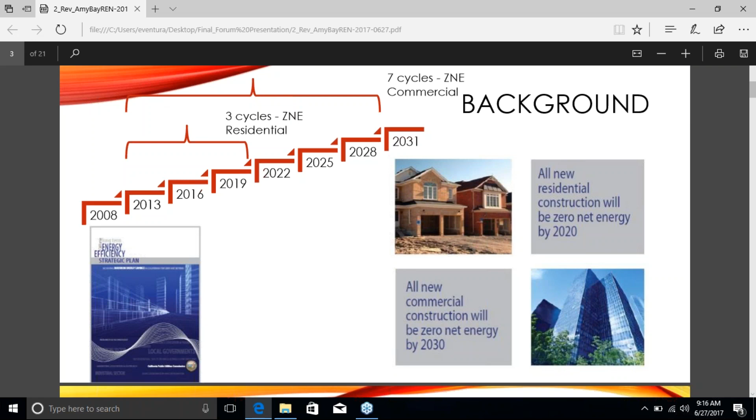So, oh yeah, oh sorry. Oh shoot, sorry. That's annoying. Sorry about that. So I'm going to take us through a little bit of perspective on where we are. I should not have sent a PDF. Sorry. Sorry. I know, that's all right. I can, if I scroll, I'm okay as long as I don't try to.

So I put this up there again just to give a little bit more context to where we are. So it was in 2008, right, the CPUC did the strategic energy efficiency strategic plan, and that was the first time we did not just short-term, but long-term planning to figure out what are we going to do and how are we going to start looking at these pretty ambitious state goals. And so that was where we got our 2020 ZNE goals defined at that point in time for residential as well as commercial. There were other bold initiatives in there in terms of making sure low income were served by a certain time.

But what I wanted to point out in terms of timeline, if you look over at that stair step on the left, so 2008, we said, okay, here's our goal for 2020, 2030 ZNE for residential and commercial. That was already after the 2008 standards were adopted. So then we had 2013, 2016, and then by 2019, we had to have that standard in place. So 3 code cycles for that. That is not a particularly long period of time for us to be going through that.

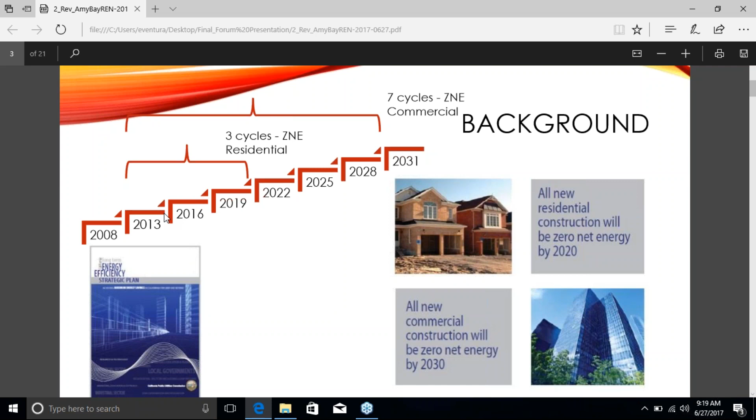So a lot was happening, and the approach to ZNE at this time was kind of energy efficiency and then some PV, and there we are, right? That was kind of our perspective. And so if we think about that time, zero net energy was super simple, right? We're generating as much energy as we're going to use on an annual basis. So it was site energy, it was super simple. It was doing it over the course of that year.

Then things started to evolve a little bit as we started to think more, because we're thinking about energy efficiency and we got some solar thermal, solar electric, and we're good. In 2016, that shifted. We're starting to look at something called the Energy Design Rating Index, the EDR, and we said, okay, well, now we're going to look at zero net energy as an EDR of 0. So you're taking still all your energy efficiency, using this time-dependent valuation metric, and then doing PV to get to 0.

What did we find out? That was not the best approach, is what we found out in the short term. So if we look at this, this is our energy design rating scale. Here's our 0 home. 100 is your code home. It's tied to the 2006 IECC, which is the International Energy Conservation Code, so that's what the rest of the country uses. And about a 2016 home is somewhere in the vicinity, 50, 60, 65, somewhere in there.

What we found out, we started doing some evaluation of, okay, well, if we're looking at EDR of 0 as zero net energy, how cost effective is that? What does that mean? Well, when you're doing it this way, you're offsetting not just your electricity, but also your gas. So we realized what was happening is we were supporting oversizing of PV significantly because you're offsetting my natural gas consumption with lots of PV to kind of equal things out over the year. This is not working out really well.

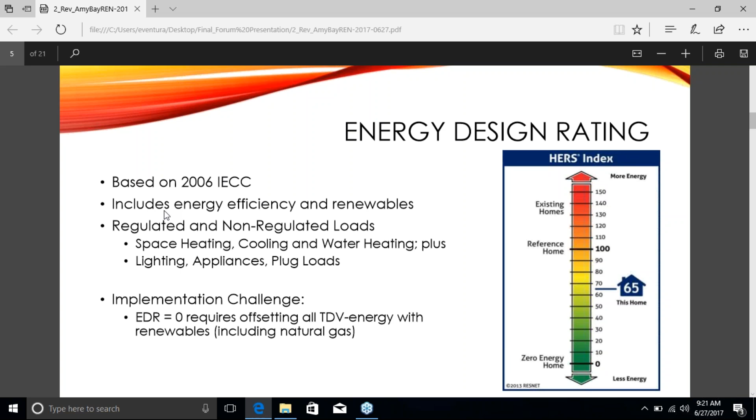How many times have you guys seen this image? Like every presentation you ever go to now? But I still had to.

As we look at this, I'm just going to make sure I'm not missing anything. As we did that cost effectiveness analysis, looking at ZNE and EDR of 0, and looking at our TDV metric, we realized that zero net energy is a little more nuanced and we have to think about it more critically.

We've got large scale deployment of PV, and PV on a lot of residential or individual buildings. We have an RPS standard, a renewable portfolio standard, so that's going to result in 50% of our energy coming from renewables, which means the value of our PV from a consumer standpoint in the middle of the day starts tanking significantly. The value of the energy is less because we have more of it.

What's also happening in this scenario is that duck curve, particularly exacerbated in the shoulder season. As a New Englander, I think it's kind of funny that we have shoulder seasons in California, but we do. In those shoulder seasons where we don't have a lot of cooling, that uses more of that daytime production, and this is really exacerbated. So our peak is shifting farther into the evening where we don't have that renewable production. We're getting this exacerbated effect.

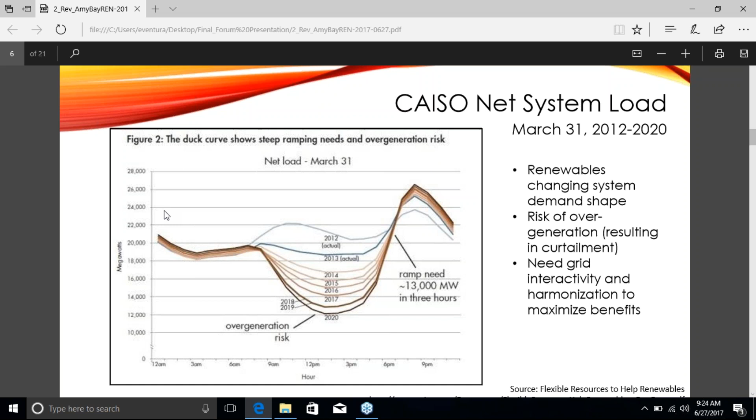We're realizing this and figuring out how do we get our renewables, have our 50% renewable portfolio standard, and then there's the bill in the legislature right now to go to 100% by 2045, pushing it up 5 years. So how do we get there? We're flattening out that belly of the duck curve - it's not so fat there, it's still streamlined, it can fly.

This is a really exciting time, at least for me in this industry. To do this - and we've always wanted to do this - it means an integrated approach, which is super exciting, because a lot of times we have energy efficiency, here's my solar thermal which is renewable, here's my PV, here's transportation, and maybe somebody's talking about storage. It's been really compartmentalized.

The conversation now, and hopefully you'll hear some about it today and at other venues, is this more integrated approach where we're looking at energy efficiency, because that makes sense, just reduce that load. Thinking about peak renewables and matching that - production and demand, aligning those at load shifting, and looking at storage and demand response. All of this to make sure that even though we have this decrease in value of PV during the middle of the day because of overproduction, we can maximize that based on demand response or storage and offset the peak later on.

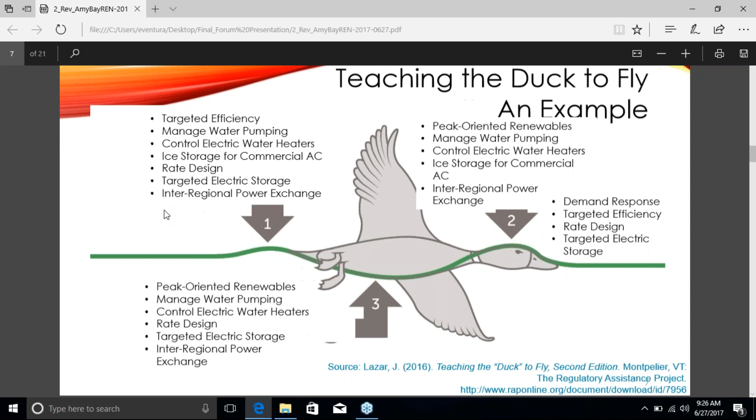So what does that mean? As we think about the 2016 or 2019 standards, we defined net zero energy, and we had the EDR for 2016, and it wasn't working. We did that analysis, so for 2019 we said we better revise this - and this is the general 'we', I'm not doing this myself - to make sure we're sending the right signals, that folks can engage in this in a flexible way, that they can be innovative, but yet we're setting a bar.

So for the 2019 standard, we are looking at 100% of the electricity use. We're not trying to offset our gas use now, we're just looking at the electricity use. Our baseline is a mixed fuel home.

What's going to be coming out of our compliance software is looking at your EDR just for energy efficiency, but then also for renewables. We may get to see storage in there too, which would be pretty cool. Things are in the works right now. And we're not trying to get to 0, we're trying to get to about 20. So the main goal for this was to encourage folks to go this way of energy efficiency and renewables coupled together, but not promote oversizing of our PV systems, so we end up with really uneconomic pushback to the grid.

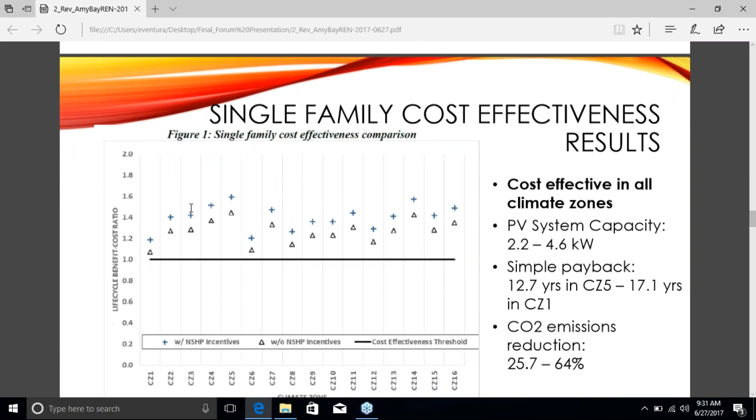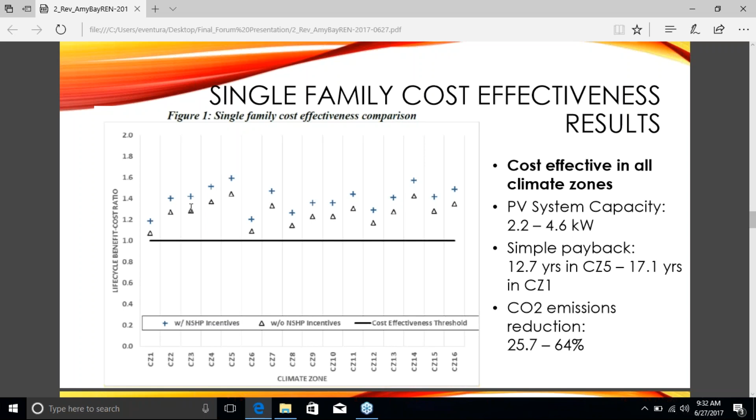So I'll go through this pretty quickly. It's cost-effective in all climate zones, and you can see the range of PV systems, 2.2 to 4.6, seems pretty reasonable, we're not crazy size. Payback period, 12 to 17 years, and there's your carbon reductions, anywhere from 25 to 64%. They did the cost effectiveness - you can see the triangles have it without the New Solar Homes Partnership, that's what NSHP is, and with it is the crosses. So obviously without it, it's slightly less cost effective, but well above the cost effectiveness threshold.

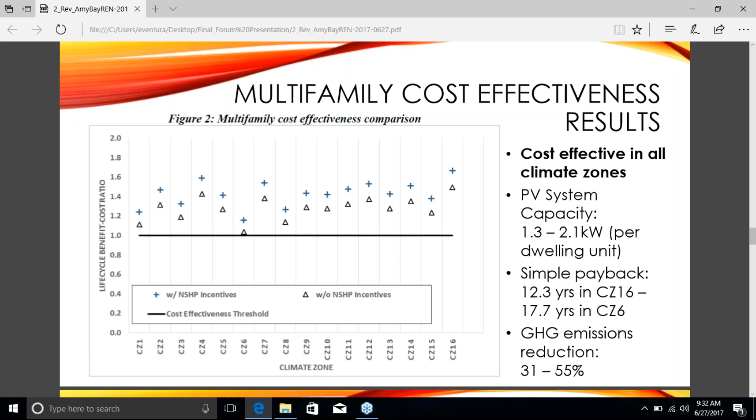From a multifamily side, this is done on a per unit basis, based on the 8-unit prototype in the software. It's 1.3 to 2 kilowatts per dwelling unit. This is low-rise multifamily - you can see it's not as cost-effective as single-family, but we're still there. And similar payback, 12 to 17 years.

What's on the website right now is the draft CEC ordinance template, as well as a cost-effectiveness study. So you can download those from the CEC's website, and you can be utilizing those in your submission for a REACH code.

I'm going to go through a couple more things before I wrap up, and I don't think we're going to do any questions because I think we have questions later. So I just wanted to share a couple of additional options, just because you're going to hear from Rachel.

And Rachel, right? Is Rachel doing San Mateo too? Oh, Kathy, sorry.

They're coming from the jurisdiction standpoint, they can tell you that perspective. I can tell you kind of what I hear, and what I hear is we need something easy, we need something clear, and we want some flexibility.

Because while there's some standards out there, every jurisdiction is a little bit different. So just to quickly share a couple of things, and keeping track of my time. Another option is looking at more of the classic compliance margin, which means a percentage better than the budget that the energy code will allow you to do. And so this has another cost effectiveness study, kind of very similar to the solar ordinance.

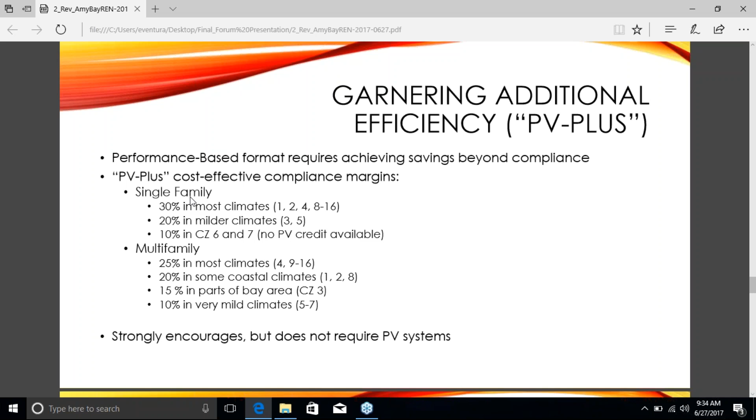Solar ordinance is mandating a particular PV size. This is mandating a compliance margin, so you have the flexibility of doing energy efficiency and PV. It doesn't mandate PV, but pretty much you're going to get at probably about 5% compliance. Homes will be about 5% more efficient than the code, and then they'll hit the rest with PV. So it's a little bit of that balance.

This is just some information on the cost effectiveness and that incremental cost above standard building, which is also the number one question: how much more is it going to be? Our payback period there is like 6 months to 1.5 years, something like that. And a little bit higher savings from the GHGs, and that's really tied to the fact that there's energy efficiency in this as well, and not just PV offset.

The next one is just energy efficiency only. This is probably a little bit more challenging, particularly as our codes get more and more stringent and there's less room just to do energy efficiency. But there's thresholds here to do 15 to 10% for single family and 10 to 15% for multifamily, just doing energy efficiency only. Again, this does not have PV tied into it.

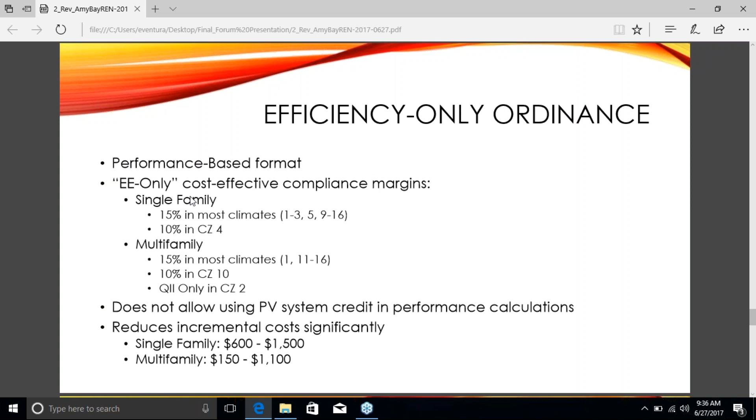The other thing I wanted to say is that, and I know Rachel DeFranco is going to talk a bit about one or two of these as well, is that coming out of 2013, in talking to jurisdictions, they were like, that was a really challenging code cycle. We're not sure what we can take on. Staffing is still low, capacity is low. What can we do? And people are feeling that the energy code is getting more and more stringent, so can we still work in there?

What can we do? So we also started doing more prescriptive, what we called single measure codes, and this allows that flexibility. Like the non-res outdoor lighting, this is for existing buildings. It can be used for new, but it's also for existing non-residential buildings, where a jurisdiction might say, oh, we've got a lot of non-residential, and that's a huge load for us. Oh, and it ties to our climate action plan. Okay, can we adopt that? Or plug-in electrical vehicle infrastructure or actual charging stations.

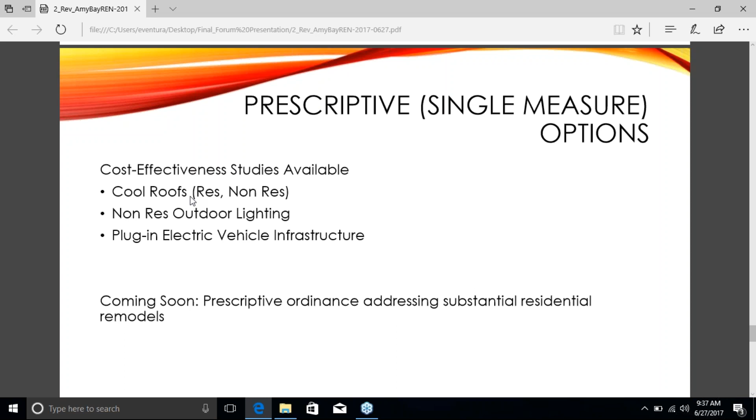So all of these have model ordinances and cost effectiveness studies, as well as documents that take that cost effectiveness study and put it into a little bit more consumable form, because not all of us love to read cost effectiveness studies. So we've kind of broken it down to be like, this is what it could look like. Based on that cost effectiveness, this is what an ordinance could look like. And then the other thing we are really trying to address is the existing building stock, substantial remodels.

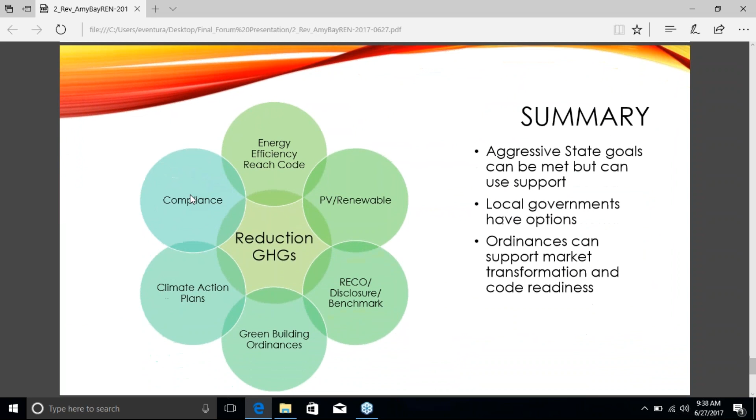So my time is up, but I just wanted to leave it here for a moment before passing it on to the jurisdiction so you can hear more specifically from the boots on the ground. Again, I think it's a really exciting time. There's lots of opportunity. We have incredibly aggressive state goals, and there's legislation looking at making them more aggressive. We have jurisdictions that are stepping up and signing the Paris Agreement.

It is a lot of opportunity, a lot of goals out there, and as local governments, you have that opportunity to support them. And they do need support. They need to have activities happening at the local jurisdiction level that show these wins, that show these accomplishments, that show these impacts. And those ordinances support the market transformation. They support code readiness. They start getting us to our goal.

So one of the things I'm excited to see is as we start seeing folks adopt these ordinances, whether it's an energy efficiency reach code or a PV and renewable, or it's disclosure or green building, whatever that flavor is, that we start seeing that impact, tracking it, and being able to demonstrate it so other folks can go, aha, that's working, it's having that impact, let me do that. Or somebody says, oh, then I'm going to do more because it's being effective. So I'm excited to hear more about the boots on the ground and where we can continue to support local jurisdictions.